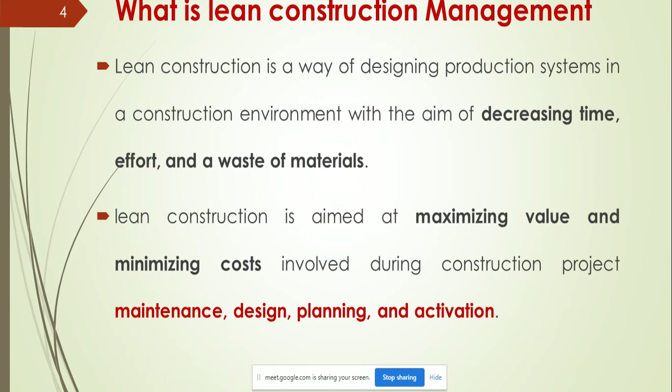In a construction project, we have different phases: one is the maintenance part, another is the design part and planning, and then execution. These things come under lean construction management. That is what we mean by lean construction management, and this is the general process.

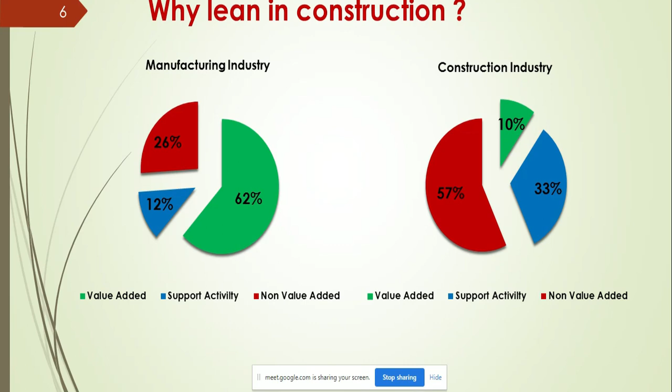First one is defects. We have to reduce all the defects that occur - in our case we call these reworks. Once you start to reduce the reworks, the value of your project is going to increase.

And overproduction - for example, if you want to make cover blocks for your slabs, and you are making a lot of cover blocks, that is overproduction. Similarly, if you go for prefabrication kind of building structures, overproduction causes major losses.

And then waiting. Waiting is the most dangerous thing in our construction industry. Whether you are going for concreting, formwork, or rebar, everywhere waiting is a major issue.

Underutilization of talent - this is for the manpower. We have to identify the right person for the right job. All you engineers, once you pass out from final year, you'll be an engineer in some organization. That organization has to understand your talent. If they don't understand your talent, you won't stay at the same company - you'll move to another company that understands your talent.

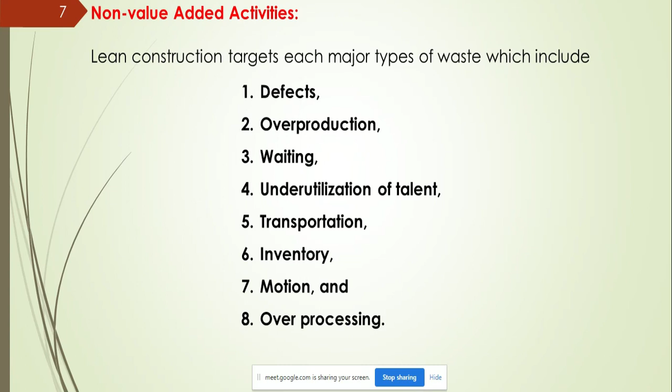These 8 points are non-value added. If you carry out these 8 things, you are going to face losses in your particular product output. So these are some things: defect means effect caused by rework, scrap, or incorrect information. Overproduction means making more than needed before it is needed - that is, if you are making a lot of things before it is needed, that is overproduction. Waiting means the next step process.

That means one process is over, and if you are allowing a lot of time for the next process, that is waiting. Non-utilized talent means you are not understanding the talent, skills and knowledge of a particular worker or employee. If you don't understand their talent, you are going to lose them.

Then transportation means unnecessary movement of products and materials. Inventory means excess products and materials not being processed. There is also unnecessary movement by people walking. Extra processing means more work or higher quality than is actually required.

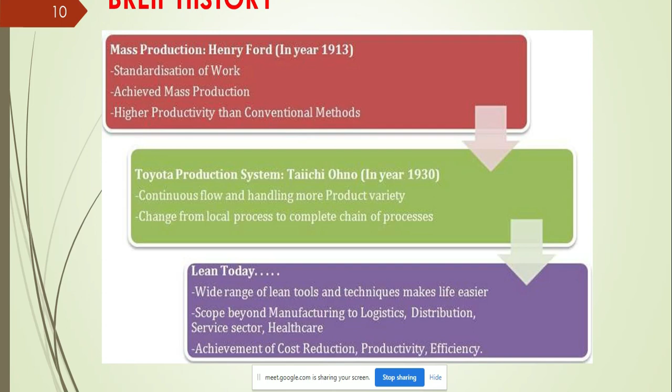This is the history of lean management systems. A brief history - the same thing automobile adopted, as I've said, and these are some of the key policies that have been adopted in lean construction.

That is workflow standardization - we have to create a standard manner. So we are using a lot of IS codes to make a mix design, and whatever things we are doing, we are going to standardize and decentralize the process.

That is what I said - we have to decentralize, we have to create everything in different manners. We have to decentralize everything and make it in different aspects.

And workers are more than just cogs in a machine - workers play a very vital role in any kind of manufacturing. So we have to allow them, or we have to accept adaptability and flexibility towards improvement.

I think because the workers are working in the particular work, they know what problems will occur and how difficult it was. So you have to allow time to listen to what issues they are facing in the particular work. Once they give the issues occurring in that particular work, we can give a better solution.

Or sometimes we cannot anticipate what the issue is. The small workman or small labor can give a better solution for that particular problem. So if we are sitting at the management table discussing issues, we cannot identify the solution. If we call one laborer and ask for solutions, they would give a better solution than what we are thinking. So we have to always have adaptability and flexibility towards improvement from the workers' perspective.

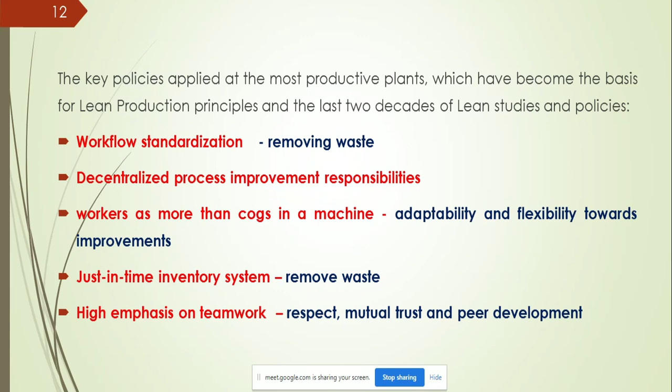Peer development means you have to give input for that particular person, and he has to give input to you. Then you have to mutually develop a solution for the problems.

For the construction industry, if you have a lot of experience, there is no difficulty in recognizing the problem issues. But if you are not experienced, you have to understand lean management. The major difference between manufacturing and construction industry is that manufacturing is under a roofed production system, but ours is prototype. Every project is unique, everything is practiced differently, so we are not practicing the same things. But lean construction gives better lessons and principles to achieve better productivity and better quality, so we are ready to learn the principles of lean management.

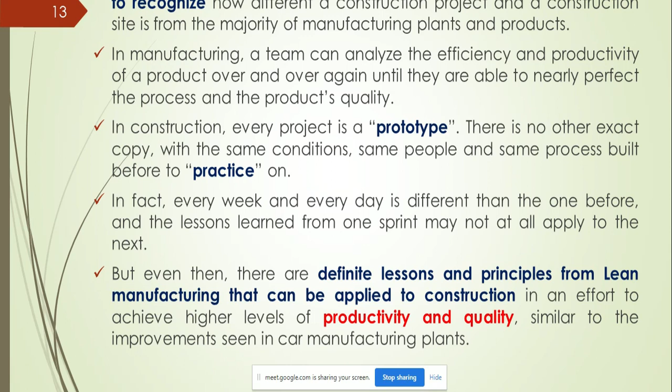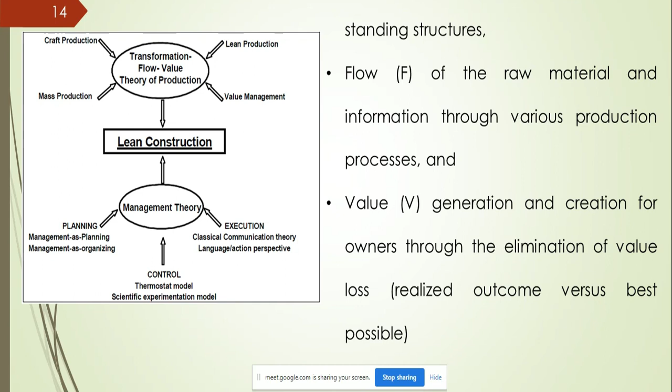This is the lean concept of lean construction. The first one is transformation. Transformation means we have to understand the real situation and then allow a flow to be created, to generate value and effective output from the lean construction process. There are 6 principles in lean construction management.

The first principle is identify value. We have to understand why the project is carried out, what is its importance, and how it gives better opportunities for everyone working on the project. So you have to identify the value and define the value stream. Earlier I said we have to prepare the value stream of your project, eliminate waste, and create a work process flow, then do pull planning.

We have to crash our time and crash our cost. Once you crash your time and cost, and if you are pulling the planning and scheduling, you can get better results and continuous improvement. The main point in lean construction management is continuous improvement. You have to allow a process, monitor it, control it, and continuously improve the way of practice.

If you are practicing one way, it reaches some point. If you have any idea to improve it, you apply it in the next stage and check what the process is. Again you allow for the improvement and check it. So whatever work you are doing, you have to think about what way we can enhance and improve the process to get better results.

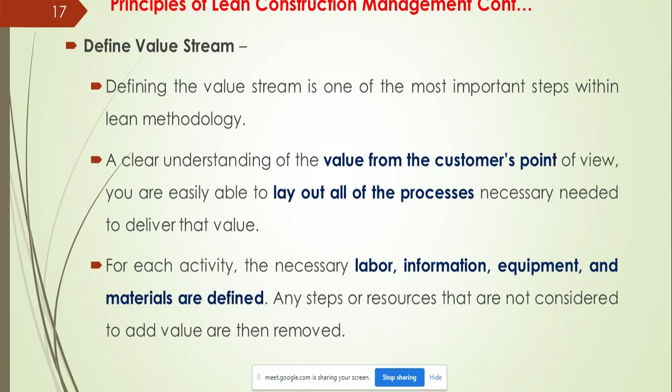Only three outputs are needed in our construction: how to minimize the cost, how to minimize the time, and at the same time how better we can get the quality of the project. If these three objectives are obtained by continuously improving the process, we can be a successful engineer or successful project manager. These are some of the points about the 6 lean construction planning principles I have mentioned.

These are the lean tools available in the whole world. Some of the lean tools I have mentioned here. Lean tools mean the methodology. Suppose I am a person with an idea, and another person has a different idea, and another person has a different idea, and each of us has faced different problems and given solutions for whatever problems we faced. These tools were created based on that. One person faced a problem and gave a solution, another person faced a different problem.

So similarly, we have around 20 or 25 kinds of lean tools. I have given some of them here. The first one is Kaizen, the initial stage of lean tools. Second is fail-safe for quality. Third is just in time. Then work standardization, 5S plan, increased visualization tool, integrated project delivery, total productive maintenance, total quality management, concurrent engineering, value stream mapping, pull approach, creative thinking, and last planner system.

This is the last planner system. We are using it in most construction projects. The last planner system is adopted by most organizations in the construction industry. All these tools might be used in different industries, especially in our construction industry.

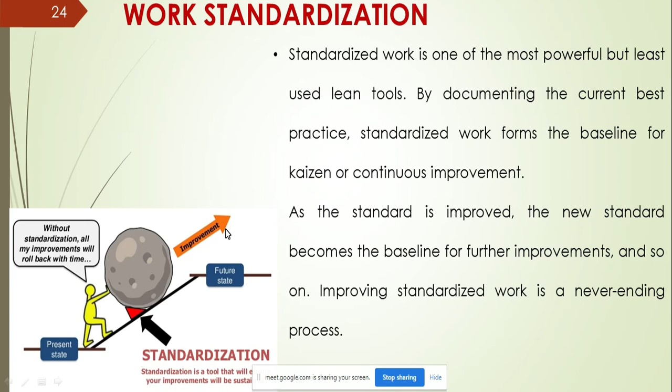This is one milestone, next step I have to do this one. That is a milestone. For example, if you are taking a residential building, first milestone is completing the substructure.

Substructure means it involves earthwork excavation, then we go for sand filling, then PCC, then footing concrete, then we construct grade beams, and go up to basement level. Then we fill sand on that basement area, consolidate it, and raise the superstructure. This is the first milestone.

I have to fix the milestone first. I want to complete that substructure within 15 days, and this much cost. That is one milestone.

Work breakdown structure means, within that particular milestone, substructure is the milestone, and excavation is the first work. That is work breakdown - where I break my works, how I split my works, how I decentralize my works. First I have to finish earthwork, that is one work breakdown structure.

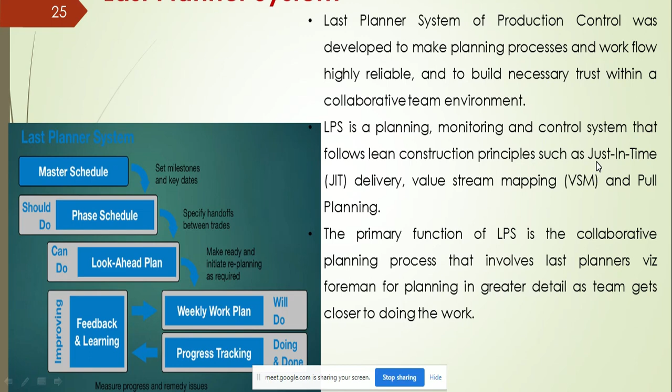So in this, just in time also adopts value stream mapping, and allows pull planning. These three are mainly what we use for construction industry. Last planning, monitoring and control systems - this can be adapted using just in time, value stream mapping and pull planning. These are the things we use in our construction industry.

And fail safe for quality - so this is check quality, check safety. You have to check the quality of your work and you have to check the safety of your work. Once you check both of this, we can able to improve that.

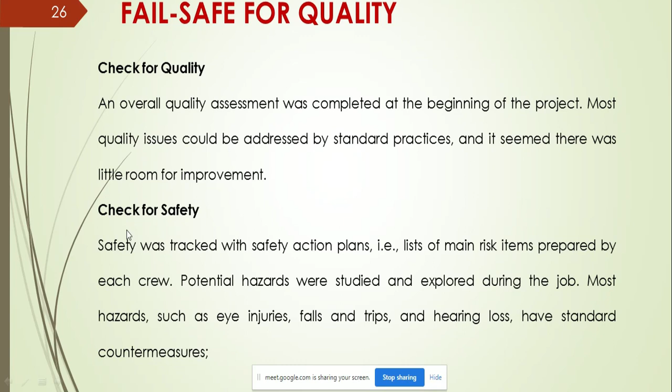If it is needed, then again order to the third stage to order to the second, and second has to order to the first one, then it delivers, the second will deliver to the third. If third needed, he orders to the second stage, and second stage orders to the first stage. So this is a process.

What normally we will do this, we will do in the procurement department. Procurement department means we have to create an invoice. Suppose if I want 100 bags of cement, the site engineer will give indent or invoice to the project manager, and then project manager will give that to the procurement department. So procurement department is stage 1, project manager is stage 2, and site engineer is stage 3.

So procurement department first issues 100 bags to project manager. The project manager will issue the 100 bags to the site engineer. Once the process is over, again the site engineer has to raise an invoice to the project manager. Project manager has to invoice the procurement department. This is a cycle process.

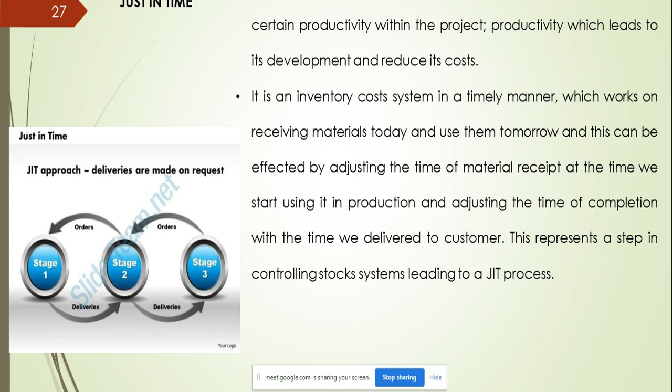Whenever the particular resource is needed, that time you have to order it. So you need not purchase so early to store it at the site. Whenever we need it, we can purchase at that time. That will reduce the waste of your materials. So this is also what we are adopting in our construction industry.

And increased visualization. Now everyone in our construction industry has started working with this visualization. That is what we used to call as BIM. BIM model, BIM model. BIM model means it is a kind of software we are using, building information modeling, building information management. That is called BIM, 3D visualization.

That is, before the project is executed at the particular site, we are creating using the software to identify how the project goes up, how the project is moving in that. We can able to visualize it in the computer or in the software itself. So if I am having a project, I am going to create a BIM model, and I am going to put the information about the particular project and create it in a virtual manner. Virtual means it's not real, it is a virtual manner.

I am creating it virtually and identifying where all I am getting clashes, where all I am getting issues. So once you start to create a virtual model, we can able to understand where the clashes are coming, where the issue is coming. Once you find out all the issues in the virtual model itself, when we are going to implement it in the real time, in the real project, we can sort out that kind of issues. That is what visualization means in the project.

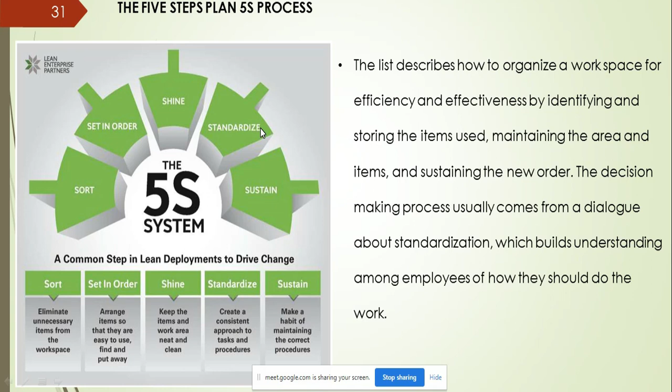First you have to identify the problem, sort it out, and create some order or process, then check whether it is giving a better result or not. If it gives a better result, make that the standard procedure for carrying out the work, and keep it for the long term. This is what they are doing in the 5S system.

For example, in our construction project, separate materials and equipment, and remove or dispose of material and equipment that is no longer needed. So you have to identify and sort out. If any project has excess material or excess equipment, remove or dispose of it if not needed for long.

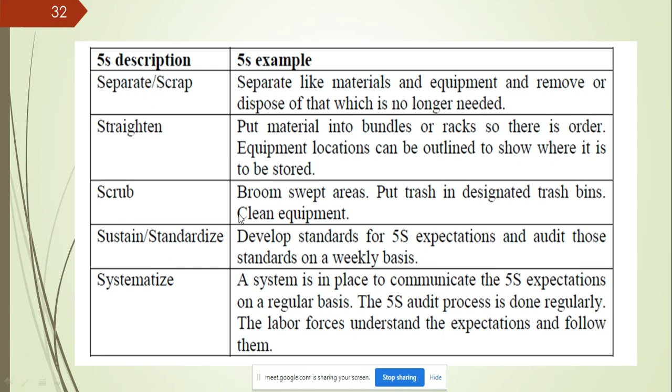Suppose it is not used in the long run, then straighten it - put the material in bundles or racks, keep it in a better way, and then shine, standardize and sustain your system. This is the 5S system.

Next one is the Kanban system. This is also a Japanese system. We used to normally work this way in our school days.

In school days, whatever homework was there, we had to give priority to the homework - which teacher is giving more punishment, which teacher is giving less punishment. That kind of process you used to think at school level. Based on that, you give priority - whichever teacher is very tough or gives more punishment, you finish that particular work first.

Next is Poka-Yoke. Here we have to identify the problem in the initial stage itself and give the solutions. In Tamil they say 'முதல் கோணல் முற்றும் கோணல்', or in English, the first impression is the best impression. Based on that, you have to clear the problem right from the start.

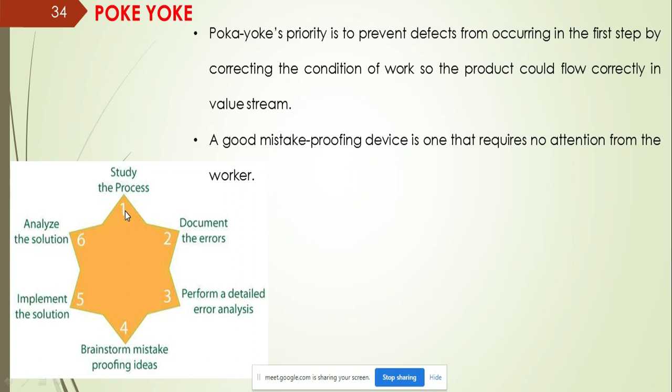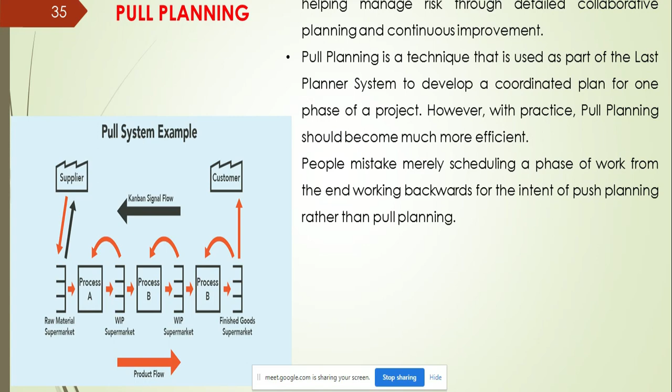So this is the pull planning. Pull planning means first you have to do a first process. As I told, work breakdown structure is the same thing, based upon milestones you have to work on it. First you do the first process, then the second process, then the third process, and finally you finish your project. This is what pull planning is.

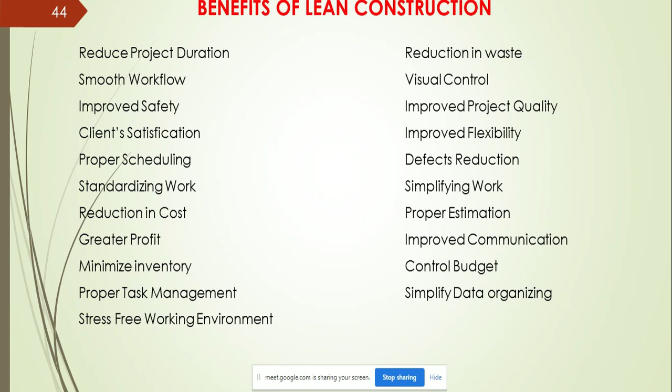And four parties mainly get an advantage with lean management. First is customer, so whoever the client or owner, they will get a benefit. Then business or contractor, whoever the contractor is. Then management, which is the organization, and the staff. These four will get a benefit by lean management.

I will get a pleasant, positive work environment. If I have everything in hand, I am very happy to work in that area, and I will be relaxed to work. If I have a lot of issues, I will get more stress, and if I get more stress, I cannot focus on my work, so automatically my health will get some issues. But if everything is in the right way, I will be very relaxed, I can work pleasurably in that area, and I can give better feedback on my project.